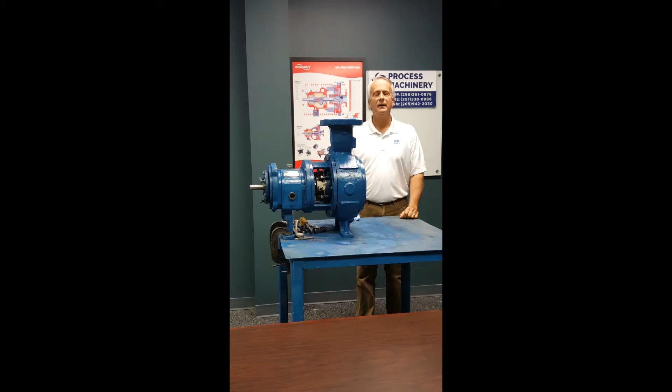Okay, today we're going to talk about tearing down a pump and maybe doing a little troubleshooting of the pump, why it failed, and then we're going to go through the dial indicator steps, impeller adjustment, and reassembly of the new mechanical seal.

This is an overhung pump, bearings back here, shaft over here, so whatever we show today is going to be applicable to any style overhung pump. Much of what we show today will be applicable to between bearing pumps as well, but you just have to apply the dial indicator steps for that style pump as opposed to this style pump.

So we got all the bolts loose except for this one. And by the way, I'm looking here, and the first thing that I do when I come up to a pump that's failed is I visually look in the mechanical seal area. So your old seal has a specified gap between the drive collar of the seal back here, which locks your seal to the shaft, and the back of the seal gland.

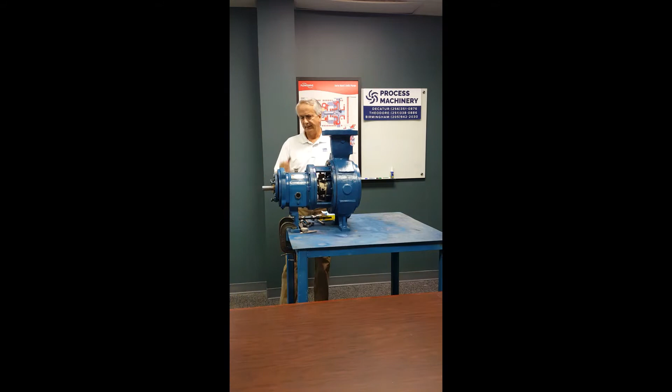And notice these are setting clips. So this seal actually is a demo seal, but your seal, the old one, the setting clips will be removed. But the first thing I look for is, did this gap change compared to whatever your mechanical seal drawing specifies? If it did, then maybe you got a bearing issue, or maybe somebody didn't tighten down the set screws adequately, or vibration caused them to back out. Okay, so here we go.

I also noticed, by the way, just on this pump, this is an open style impeller, and the clearance in your IOM manual is between the front side of your impeller and the pump casing. Well, I'm noticing here a big gap, and in fact I got the feeler gauges out, and the gap is quite large. It's almost 200 thousandths of an inch.

And on this style pump, you'll have to consult your own manual, but generally 10 to 20 thousandths of an inch. Definitely temperature dependent. As the metal grows, those gaps have to be opened up. Okay, all the bolts are out. We're going to hopefully drop this casing.

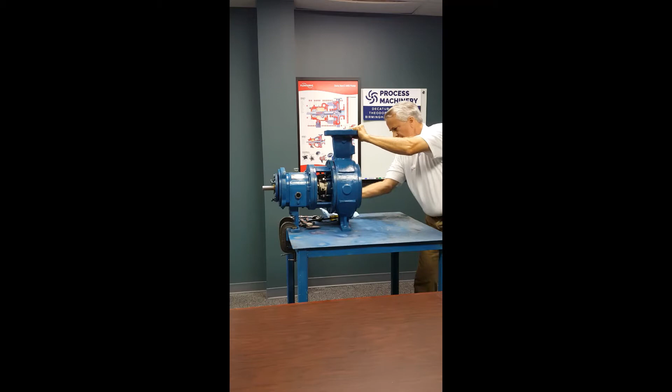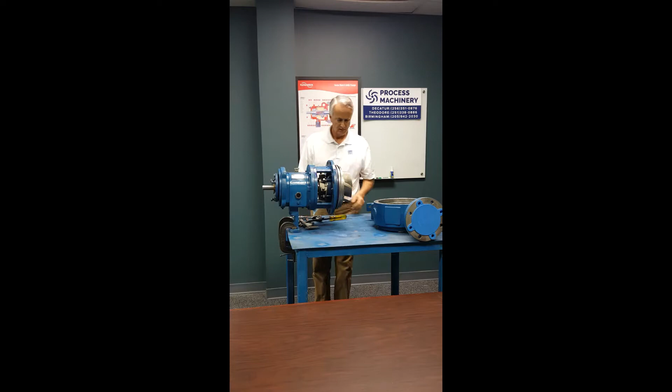I can clearly see inside the pump casing there's a tremendous amount of wear between the running clearance of the leading edge of this open style impeller and the casing. So really, in this case, that casing is completely shot. The impeller doesn't look terrible, but that's something to look at. Definitely no reason to rebuild this guy.

All right, so next, this particular impeller is a threaded on impeller, and so you want to get the impeller off. Okay, so now we're gonna unscrew this impeller, and a lot of times they're gonna be tight because the rotation of the pump tightens the impeller, and if you've got cavitation or vibration, it's going to just tighten it more and more. So here at this shop, we make these shaft wrenches of various sizes of common pumps. This way you don't scratch up your shaft. Please don't use a pipe wrench.

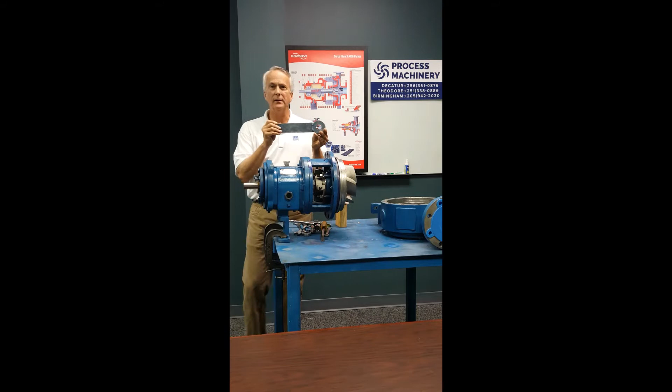Okay, so we put some key stock in here, put our shaft wrench on here. We're going to take this block and we're going to screw in the opposite direction of pump rotation and jam the impeller against it. Okay. That one came out amazingly easy. So we're gonna unscrew our impeller off. You see it open up maybe.

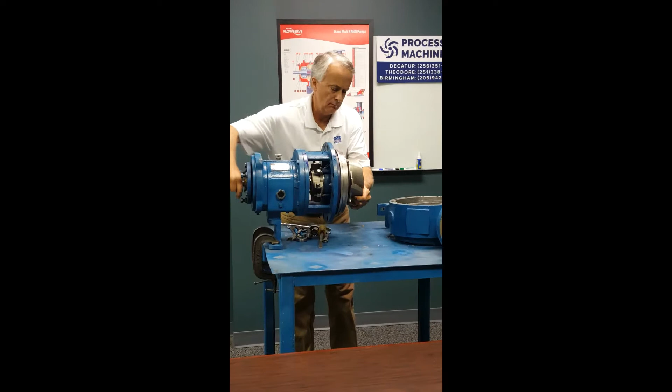Okay, and so these are the leading edges of this open style impeller. And these have to run in a close proximity to your pump casing. Otherwise you lose all kinds of efficiency and therefore flow rate.

All right, now this is our stuffing box. Some people call it a rear cover. There is a gasket that seals the rear cover to the pump casing. Inspect it, no problem. Here we go. We're going to set this thing in here. It looks pretty good. So when you use a new gasket, just go ahead and put it on your parts and make sure you're not going to have any problem when you try to go together.

All right, there are two little keeper nuts that hold this stuffing box in place. These are our mechanical seal bolts. What I'm going to do first is loosen the mechanical seal bolts, remove them. That way the mechanical seal will stay on the pump shaft for now.

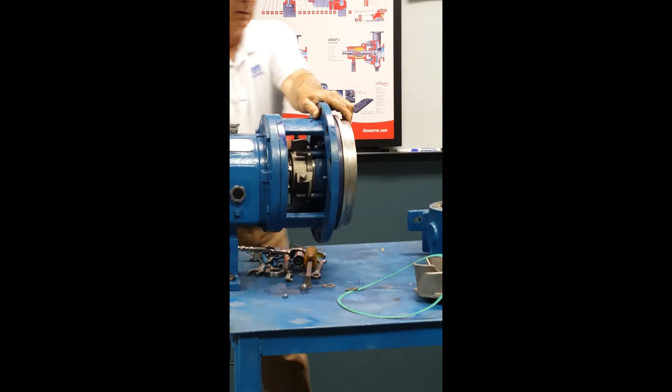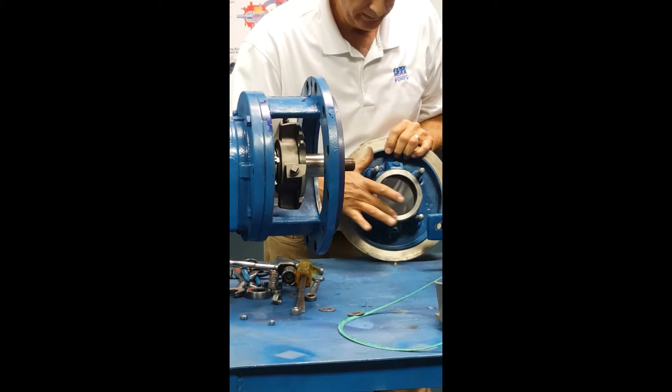Okay, then I'm going to remove these nuts off these studs. Hold on to this in case something were to turn loose on you. Okay, and then we're going to remove this guy. Notice the mechanical seal is staying in here. This is the stuffing box. The mechanical seal gasket seals to this surface here. So it'll be critical that we look at this surface, inspect it, make sure it's in good shape.

Notice also that this has a machined OD here and it has a machined ID. So while this particular mechanical seal is a shaft-centered seal, they also make seals that are stuffing box centered seals, where there's a registered pilot that goes around either the OD or a male register that goes into the bore of the box. Two different type configurations there. This, by the way, is a single standard cartridge seal, nothing special. Okay, coming off with the old seal.

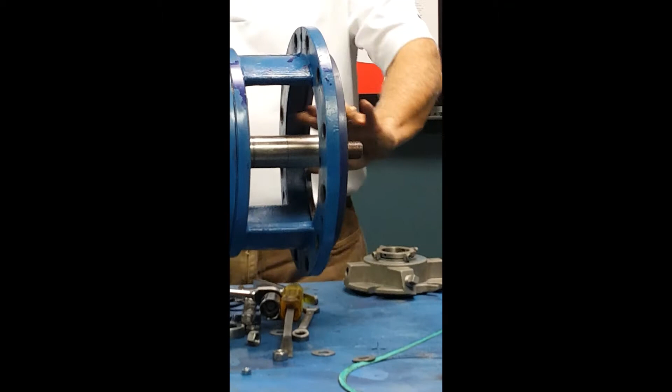First thing I do is I inspect the shaft to see if there's any kind of action that might have taken place between the set screw area of the seal and the shaft, like it lost its grip and it was spinning out, or I look for the indentions, the dimples for the set screws, because what drives the seal are these set screws. They're cup point set screws that bite into the shaft. In fact, this shaft does have some evidence that in a previous life the seal did spin out on the shaft.

Either way, I look at the shaft or the pump sleeve and inspect to make sure that we've got a nice chamfer on the leading edge so that when we slide the new mechanical seal up there, it'll go on successfully, and whether or not we have any high spots or any kind of dents or variations in this shaft. Maybe it does, maybe it doesn't, but if it does, you need to replace that.

Okay, so now we're kind of into our full inspection of the pump. The only thing that was a problem on this pump was the mechanical seal was leaking. We think the bearings are good, but we got to verify. If your oil is clean and clear, maybe you don't need to change bearings. If all your dial indicator readings are good, then no reason to, in my opinion.

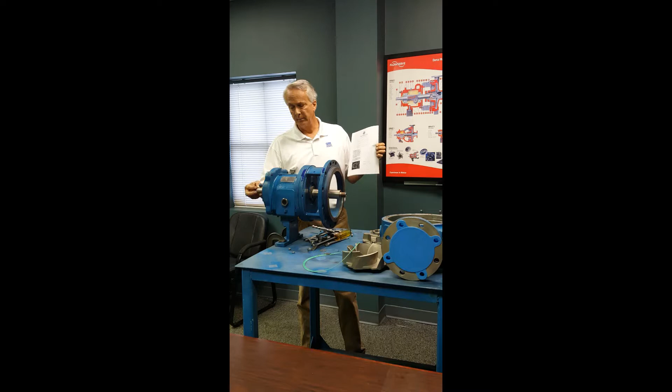Many times people remove coupling hubs with hammers. That's a really bad idea. This shaft is not very big in diameter, and it is extremely easy to bend this shaft. So either put a set of pullers or use pry bars on opposite sides, but please don't use hammers to knock off your coupling hub.

We also have checks for bearing fits, where we lift up and down, see if any looseness, on both ends. And then we also mount a shaft mounted indicator, pull the stuffing box in without any studs, and we sweep the face of the stuffing box to make sure that it's perfectly square with that shaft. Any angularity of your stuffing box face, like this, makes the mechanical seal work extra hard every revolution of the pump, and they'll fail quickly if you've got an out of squareness situation going on.

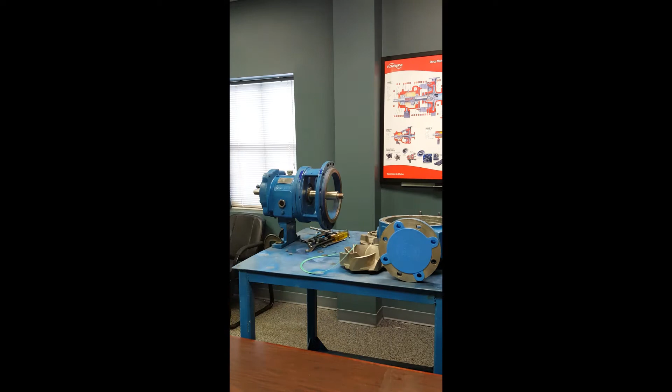Okay, now we're going to set up a dial indicator too. We're going to show you how to do these readings, and we're actually going to fill in the readings. Okay, so we've now got the indicator set up in a fixed position. The indicator needle is running on the shaft approximately where the mechanical seal faces are running.

And we're going to fill in this value, and it's a good idea to do this on every pump you work on. That way you got a record of it, and you will catch so many things that might be wrong with the pump that you otherwise would be unaware of if you'll do these indicator steps. But anyway, we will record the inboard, which is next to the impeller, reading right here.

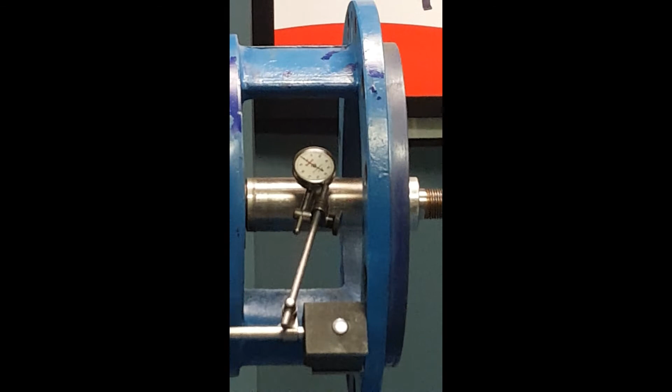Okay, so our indicator is on 0. We're tight here, we're tight here. I check it to make sure, pulling it just a little bit, okay? And also check to make sure my indicator needle is not bottomed out, which it is not. And I'm going to slowly rotate this thing. Make sure I rotate it 180.

I'm watching the indicator. It did move some, yeah. Okay, so I'm seeing about 0.5 thousandths. The tolerance there, obviously less is better. Maybe 2 thousandths max. If it's a big diameter shaft, that tolerance may go up a tad. But on this style pump, typically I don't like to see more than 1 thousandths, but you can get away with maybe 2.

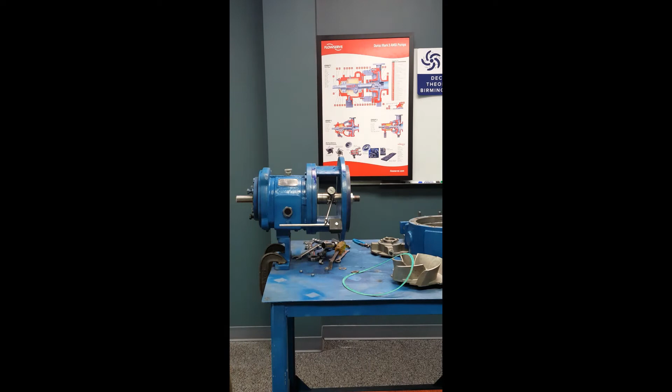Okay, we're going to take this indicator now, and while we're in this same setup, we're going to skip to this dial indicator reading right here, which checks for looseness in your housing and in your bearings. We're gonna check it on both ends. So basically, I'm gonna grab this shaft and I'm gonna pick up and down on it and see how much travel is done. So, can we see that indicator? All right, so

I don't want to put so much force on there that I bend the shaft. I'm seeing next to nothing there, maybe a half thousandths. That suits me. So now we'll go to the other end of the pump and basically do the same thing.

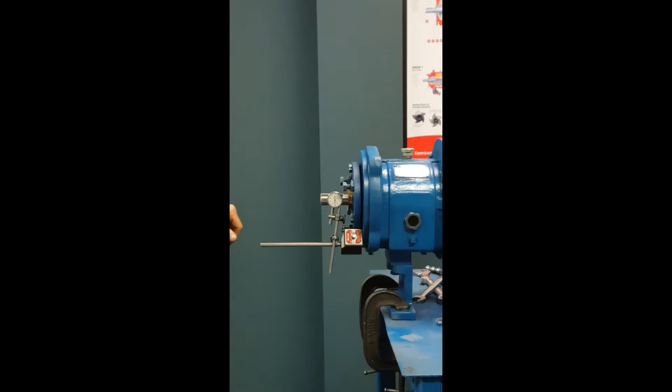Okay, now we've got the indicator set on the outboard side of the pump. We're going to check the coupling end. And of course you got a keyway, so you can't measure in the keyway, but we start on the edge of the keyway. I've got it zeroed out. And let's see what we get. We're going to check for shaft run out. Is it straight?

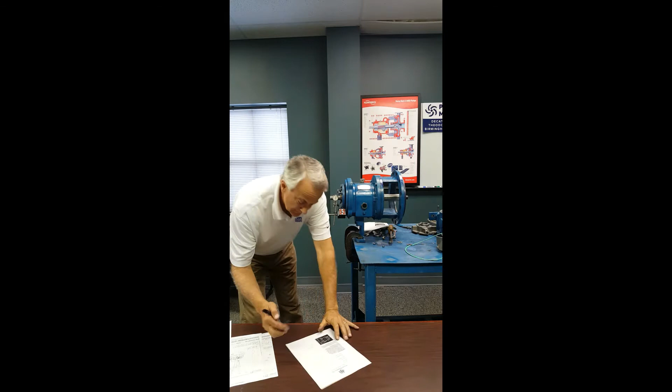I don't see anything back there. Well, I do actually. My bad. Maybe a half. And oh, by the way, on this sheet, we've written down our inboard shaft run out at a half thousandths. I'm going to write in here now the outboard run out at a half thousandths. We also wrote down the bearing fits on the inboard side at a half thousandths.

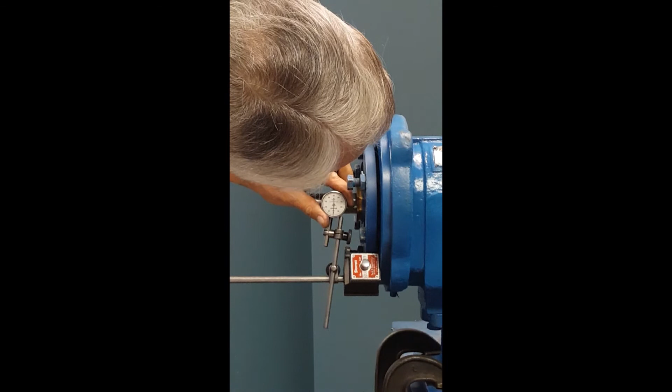With this setup here, I'm going to push back and forth on the shaft and see what we come up with on the outboard side. So our indicator, 0. A lot of times you can actually feel looseness. So when you pick up and down, if there's a thousandths and a half, 2 thousandths, 3 thousandths worth of slop built into your bearing or between the bearing and the housing, you can actually feel it clicking.

In this case, I'm pulling back and forth on it pretty hard, and maybe I get a quarter of thousandths, but I think I'm probably bending the shaft slightly, so we got nothing there. I'm gonna write down here on the outboard side, 0 thousandths of an inch.

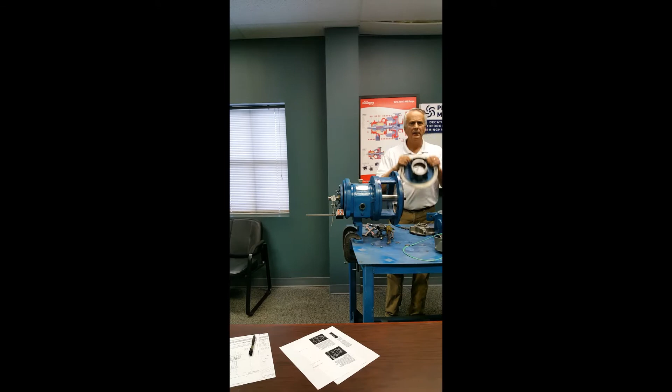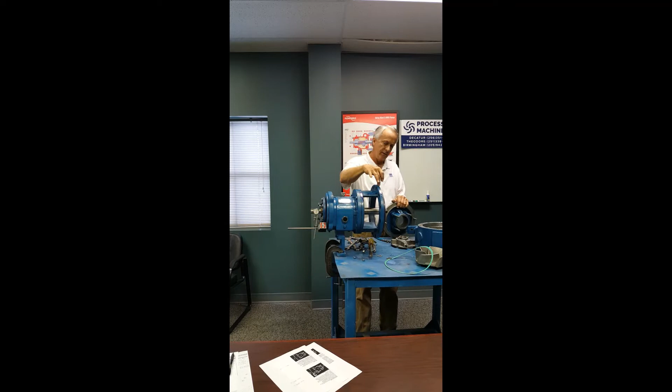Okay, next, we are going to take the indicator and we're gonna mount it on the shaft so that we can rotate the indicator against this surface that the mechanical seal runs up against. By the way, all your register fits in your pumps are very important. There's a set of dowel pins here that centers this part to the bearing housing, and then what centers this part to the stuffing box is this register right here. It's a male register, female register inside this housing.

You want to check for looseness. It needs to be a snug fit. Essentially no looseness. So to do this check, I'm going to have to remove all these studs because otherwise they're going to get in the way of the indicator. Then I'm going to mount the indicator on the shaft, and we'll show you how we do that.

Alright, I'm going to take this stuffing box and without the studs in, I'm going to put it back in the pump. I'm going to just lift up and down, and there's a tad of slop between the female and male register there. So I'm not going to bother taking it, but if that reading were more than 2 thousandths, one of your parts should be replaced. You want a good snug fit between the two. Okay.

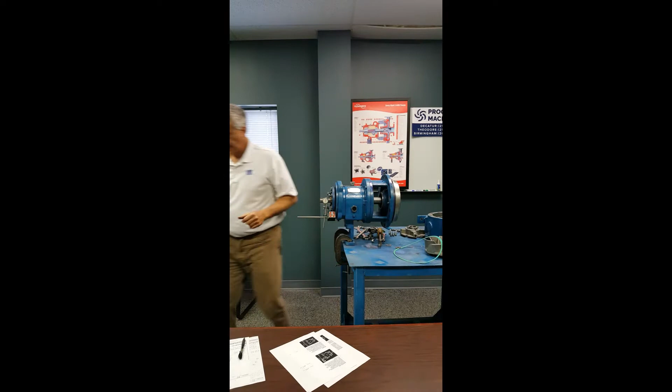So we tighten up on those guys, then we're going to mount the indicator to the shaft. Okay, so now this is another step.

We've shaft mounted the indicator, and our needle is on the face of the stuffing box. We've made sure that that face is cleaned up and doesn't have dents in it and things like that, so that we get a true reading. We've gone ahead and pulled in this stuffing box and tightened it with these nuts here. Also, the metal to metal surface between this part and this part, if there's a bunch of crud built up at the bottom, it can kick your stuffing box off. So make sure you clean those surfaces up before you put these two parts together to check it.

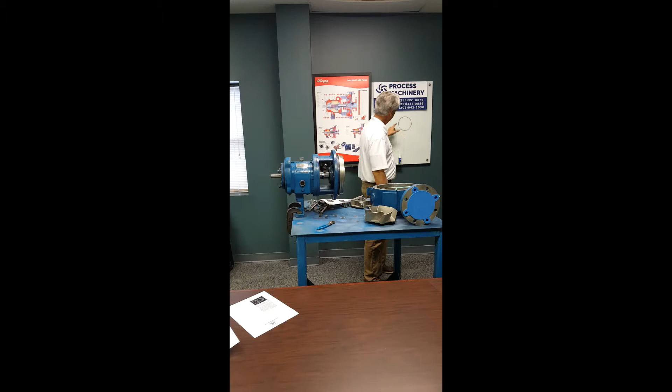But we're going to check the stuffing box face squareness to the shaft. Again, if it's like this and your shaft's like this, that seal's going to fail pretty quickly. So what I like to do is I'll draw myself a circle, and for you guys that are millwrights, we're going to take the face reading on the stuffing box here. We always start at 12 o'clock, 3, 6, 9. I record it as to where it is on the clock so that if I need to figure out how to adjust it to square it up, I know which way to go.

Okay, so you can see our indicator here. It's set on 0. It's at 12 o'clock. What I'm going to do, and you might have to use a mirror for this, but I'm going to rotate it 90 degrees and I'm going to watch it. And there's 90 degrees. I see a half. So we were at 0 at the top. We are plus 0.5. Well, actually, let's write it in decimal: plus 0.0005 inches. All right, now we're going to go to 6 o'clock.

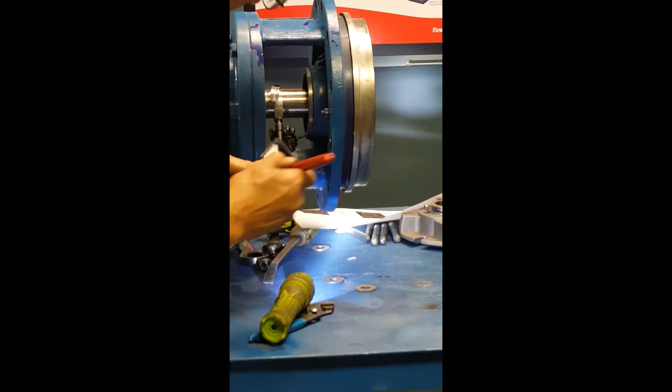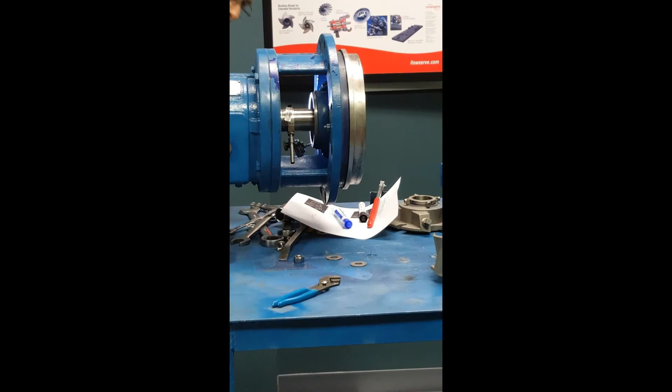And I'm going to have to get my mirror for this and my flashlight. Okay, that rascal is on 0. So we'll write that down. Sorry. Okay, we're 0 here. And we're going to go to 9 o'clock, see what we are over on this side. I'll be able to see this one. And we are -1. So we're -0.001 inches.

The tolerance on this size pump is 2 to 3 thousandths maybe. And if you take 1 on the negative side and add it to a half, your total indicator reading is 1.5 thousandths of an inch. That's okay. Again, if you get a bad reading here, disassemble this part, take your stuffing box out, and those mating surfaces where it goes metal to metal, make sure they're clean, because that could be your problem.

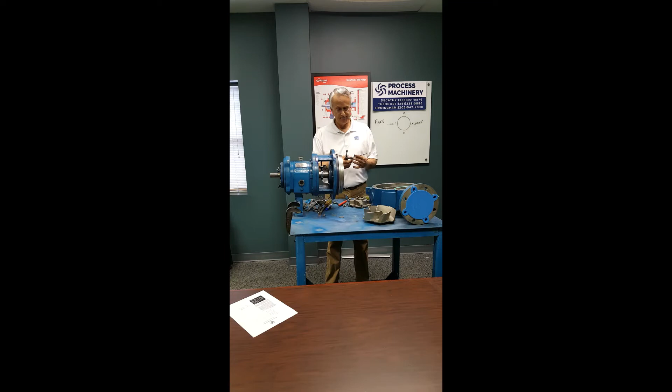There's one final indicator step that we forgot, and we'll go ahead and just knock it out for you. Okay, and by the way, before we get off this indicator setup here, this is probably one of the more important ones, but it's one of the ones that people generally don't do. Why? Because you've got to remove some studs, then you've got to go to the trouble of shaft mounting it, and some of these dimensions in here can be fairly tight. So what we came up with is we took a hose clamp, various sizes, and mounted an indicator holder rod right there, and it does a real nice job quickly attaching your indicator to the shaft. Also, Blom makes a nice tool, the shaft indicator holder with big chain for large diameter shafts. All right, we'll be back in 1 second to show you one final reading that I forgot about.

Okay, so I've recorded in here the 1.5 thousandths total face reading, non-perpendicularity of the sealing surface. While you're on that indicator setup, and if you have a stuffing box large enough, and particularly on registered fit type seals, where you've got a register between the mechanical seal gland and the stuffing box that centers it, you need to reach in here and check the rim reading also. Check to make sure this stuffing box is perfectly centered with that shaft.

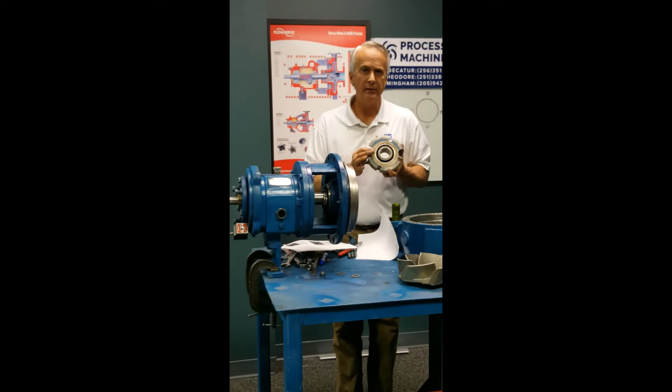This pump is a little bit on the small side, it's not practical, and in this case, this is a shaft centered seal. On the flange here, there's no register, there's no boss to center it up. When you install this seal, these clips here hold the rotating portion of the seal perfectly centered with the stationary portion, courtesy of the fact that these clips grab around a machined surface here. So this is a shaft centered seal.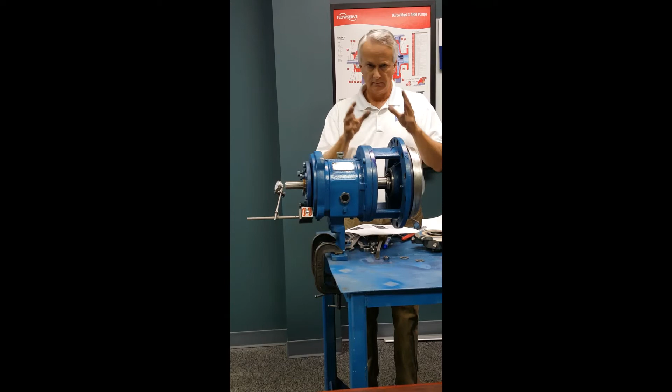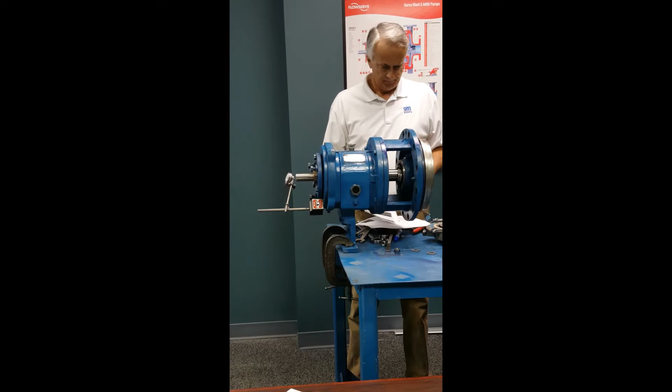So I'm not going to take the rim reading on this pump, but particularly on bigger pumps, particularly with seals that are registered fit type centered, you need to take them. And whatever you need to do to square up that face and center it is very important. Otherwise, if it's not centered up, you can actually have contact inside the seal. Your stationary face will be out of center with respect to your shaft. You potentially could touch off and fail the seal.

Okay, so in addition, the last reading that I failed to get was a thrust reading on the shaft. So we want to make sure that the thrust bearing is going to adequately hold this shaft in place during operation. So in this case, I've got an indicator set up here on the end. The indicator needle is on the shaft, and I'm going to grab the shaft without disturbing the indicator, and I'm going to pull in and out on it, try to pull the slop out of it.

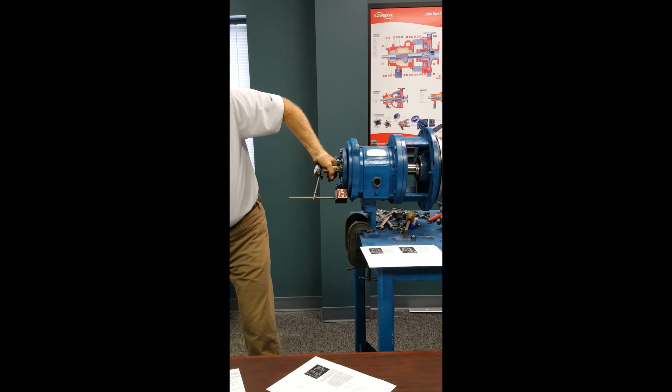Now in this case, I don't have a great grip. Okay, I'm pulling towards me, pushing away. I see a 1/2 thousandths. So I'm going to record that. That sounds good. Okay. Shaft end play. Thousandths of an inch. All right, so now we pretty much got everything done on our readings.

We've got runout of the shaft inboard, 1/2 thousandths. Runout on this end, again, 1/2 thousandths. Shaft is pretty doggone straight. Then here you've got face squareness, total, negative plus positive, 1 thousandth. This shows a setup for taking the rim reading, concentricity of the stuffing box with respect to the shaft. We did not take that reading simply because of the size of the pump and we got a shaft centered seal.

Then here are the bearing fits. We got a 1/2 thousandths on the inboard side, and we got 0 thousandths on the outboard. Good tight bearings. Then here we filled in a 1/2 thousandths, and that's for shaft end play. Now, I'm going to fill out the date, the customer, various information, the pump model, serial number. I'm going to date it. I'm going to sign it. Obviously, if there are any problems that you encounter, fix them before you go spending the money to put in an expensive mechanical seal.

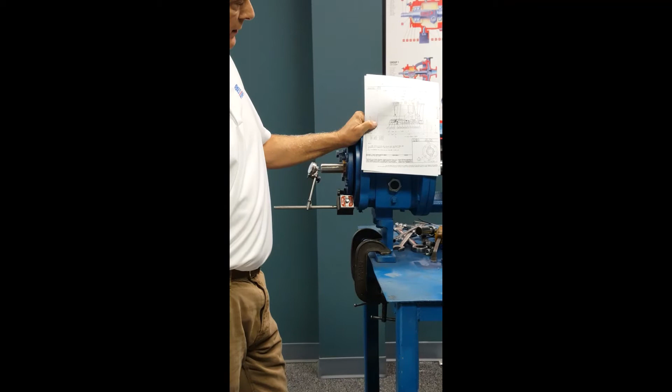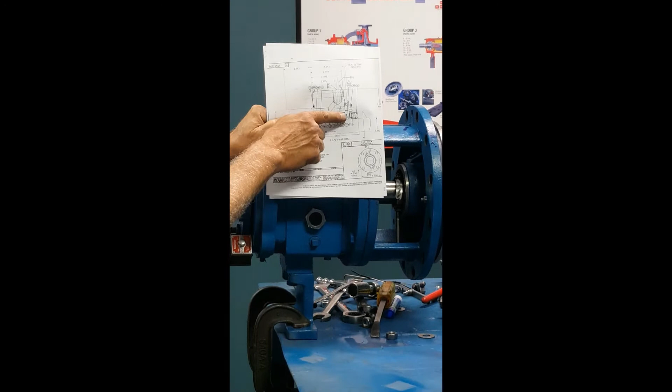By the way, I talked about a shaft-centered seal versus a stuffing box-centered seal. Well, this actually shows a stuffing box-centered seal. Here's your stuffing box right here. There's your pump shaft. This whole deal here is the cartridge seal. And notice this male lip, this male register that goes in the bore of the stuffing box. So that's what centers that seal. Notice the setting devices are simply clips that slide into a groove in the sleeve.

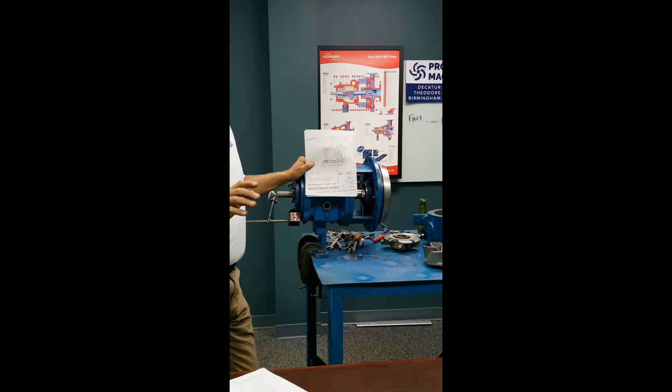So when you work on any seal, get your drawing out and figure out, is it shaft centered? Is it stuffing box centered? How do my setting clips work? Do they grip the outside of a metal surface, or do they go in a slot, etc.? This is a drawing of a shaft centered seal. Notice that there is no lip between the seal gland and the stuffing box, which is right here. Of course, pump shaft here. And also notice that the setting clips, mounted on the drive collar, actually grip around a machined surface on the back of the gland.

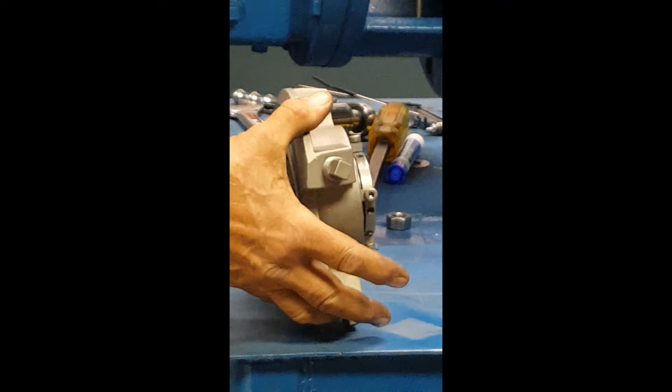When you troubleshoot seals, you get a work order that says, hey, go replace seal on ABC pump. Again, first thing I do is I look to see if they have the proper gap between the drive collar and the gland. We talked about it earlier. That's a place where, if a guy gets busy or doesn't pay attention, he doesn't properly tighten them down, or maybe he tightens them down, takes the clips off, and then he adjusts the impeller. No. Adjust the impeller with the clips in place. Do not secure the seal to the shaft. The last thing you do is set that seal to the shaft and remove whatever setting device is on that particular design of seal.

Okay, so next step, I'm going to put my studs back in. I'm going to pull all these indicators off. We're going to put in the new mechanical seal.

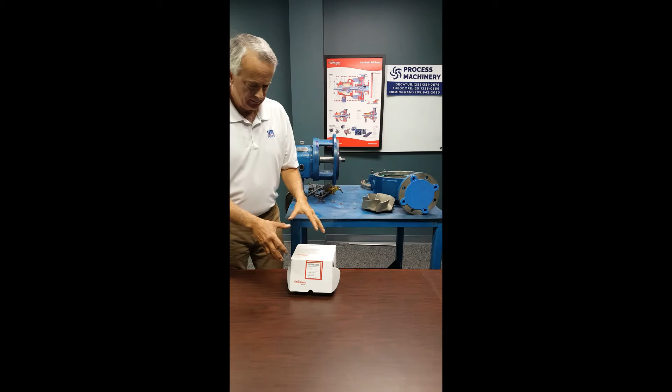Okay, so now we got our new mechanical seal. Open up the box. In every mechanical seal, generally there's going to be a mechanical seal drawing in there. It tells you what pump it fits. It gives you all the dimensions of the shaft. The stuffing box bore gives you a lot of helpful information. Generally speaking, it'll have a bill of material over here. It'll tell you the materials of the seal that you're getting ready to install.

This is a mechanical seal. It's got various cautionary notes on it. Take note of them. Read every one of them. This seal, it says it's been tested at the factory to 25 psi. They put this on a mandrel, they put clean compressed air to it, and they shut it off, and they make sure that it doesn't leak down too fast. So it passed. Then they got various shipping plugs in here.

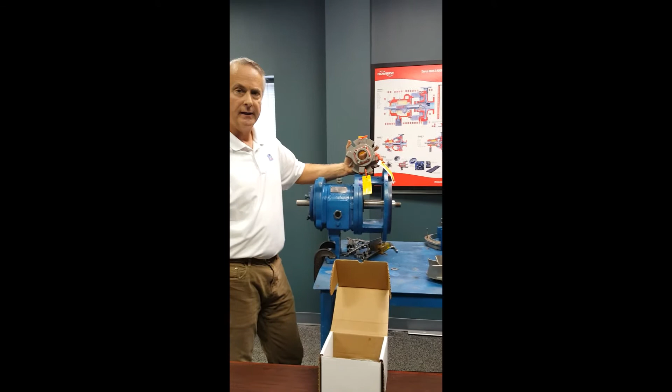Notice here, now this is something that people run into all the time. They call me and they say, well, what are all these ports on here? Well, go to your mechanical seal drawing, and it'll show you a picture of the end view of the gland, and it'll tell you which one is the flush port, which one is the quench port, which one is the drain port. Sometimes they have a vent port. This one has 3 ports, drilled and tapped ports. On your drawing, you'll see this is the flush port.

Flush means that the fluid goes into the process. The quench port and the drain port, well, the drain, that's pretty self-explanatory. If your seal leaks, you want it coming out your drain port rather than coming out the back and slinging all over the place. The quench port is also on the atmospheric side, so both the quench and the drain are on the air side of the mechanical seal faces. So, and this happens all the time, if you hook up your flush water to the quench port or the drain port, seal's gonna spray all over the place. So just take note of which ports are what.

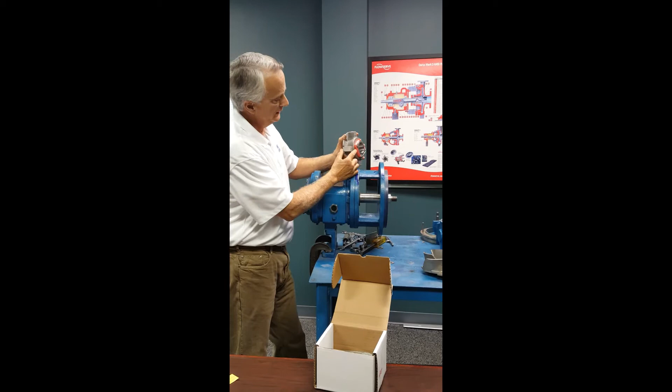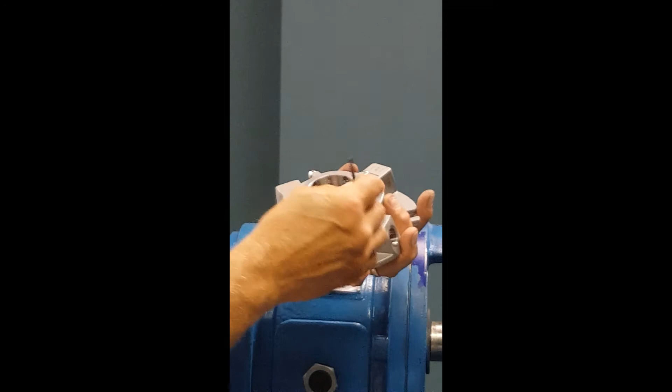So we'll remove these shipping plugs, keep everything clean. They've got a warning decal that says this is where you have to tighten the drive collar to the shaft. I'm going to go ahead and remove this because we're going to basically go through a full installation on a brand new seal. All right, first thing I do is I check very closely back here these drive lugs. The guy at the factory, hopefully he was on his game that day, and hopefully he's got these things properly secured. So I get an Allen wrench and I look at it, make sure everything looks good. I come up to these little setting clip devices, make sure they're good and snug, because if they're not good and snug, then they won't properly center things. Okay, everybody's good and snug.

And then I'll look at the set screws that are going to bite down in the shaft. Now in this case, there are 4 of them, 4 cup point set screws. Bear in mind, there are also 2 locator set screws. These are at 180 apart. Don't mess with those. As the guy's assembling them, he just snugs those down, barely, to locate the drive collar. You do not need to tighten these to the shaft. You tighten the cup point set screws in the case of these standard cartridge seals that bite down to the shaft. There are various mechanisms as far as securing the rotating portion of the seal to the shaft. They have shrink discs, they have ring feders, they have set screw driven collars. This is the most common.

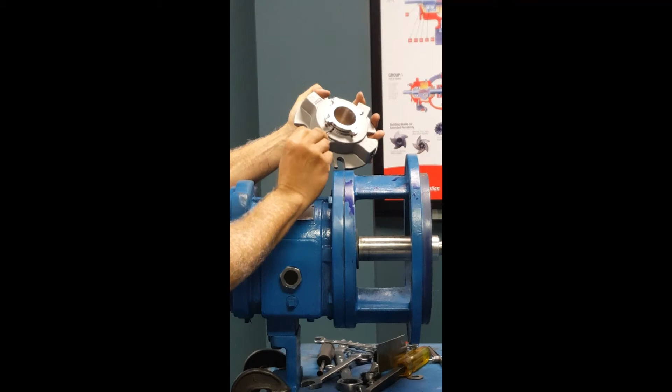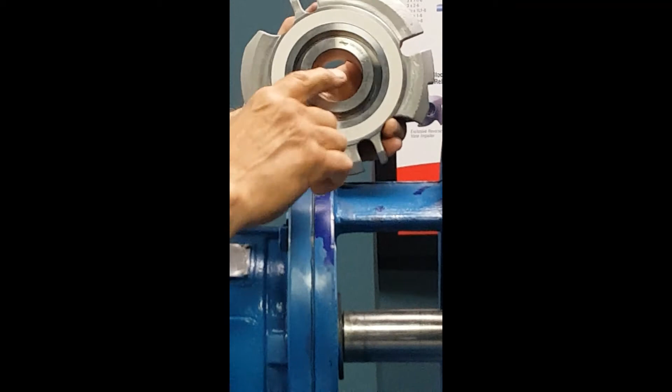I check to make sure that the set screws are backed out enough to where when this one's in just close, I'm gonna back it out just a little bit to make sure that when I slide this thing up on the shaft, it doesn't touch off. Check your gasket on this side, make sure it's fully seated in this metal here. A lot of times they'll have a female register here where the gasket will stay centered. Here's your O-ring that seals to the pump shaft when we install it. It'll be installed like so. I put a compatible grease on that O-ring, lube it up. I keep the shaft clean. Okay.

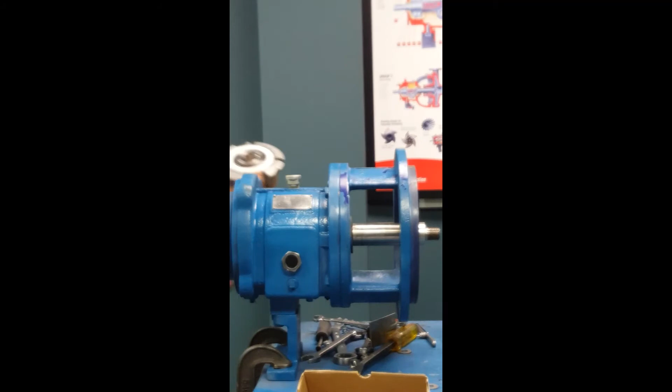And by the way, make a habit of installing the mechanical seal on the shaft. Don't do like has been done on some occasions and install this seal and tighten down on it, because look at this. This is a shaft centered seal, but look what I can do. See how it'll move all over the place? So if you tighten it down here, it's going to be out of center.

So the proper method is to put it on the shaft. And so I'm going to go ahead and install this. Now, bear in mind the quench port, look on your seal drawing, but it's normally at 12 o'clock. Okay? We're going to lubricate the O-ring a little bit. And install this guy. I got my quench port at 12. Okay. So there's the seal on there.

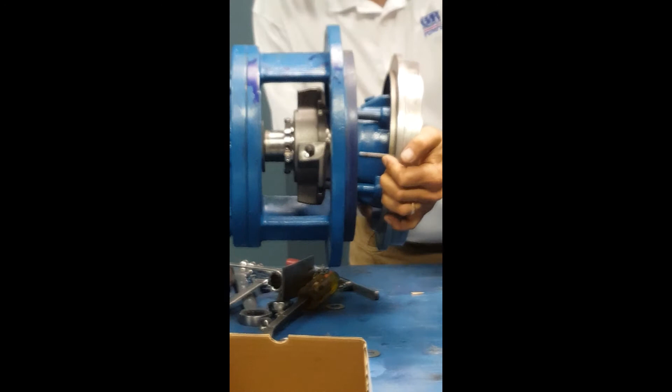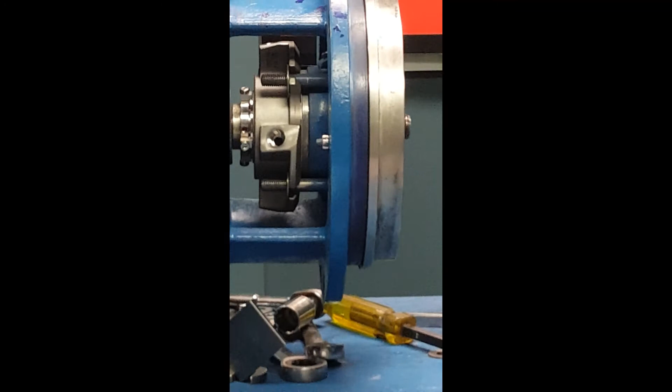Now we're ready for our stuffing box. Goes with the nuts. Okay. Go ahead and snug those up. Okay, now we grab our nuts that are going to secure our seal and our washers. Put these nuts on.

And at this point, this is a shaft-centered seal. And so it's okay to go ahead and tighten the seal gland to the stuffing box. What we don't want to do is tighten the set screws to the shaft, because once we assemble the casing, put the impeller on, we're going to adjust the impeller clearance. So the last thing you do is tighten down on those, in this case, 4 set screws, remove the clips, and you're ready to run. So I'm going to go ahead and tighten these nuts. And then I'll come back, we'll put the impeller on, we'll do the clearance.

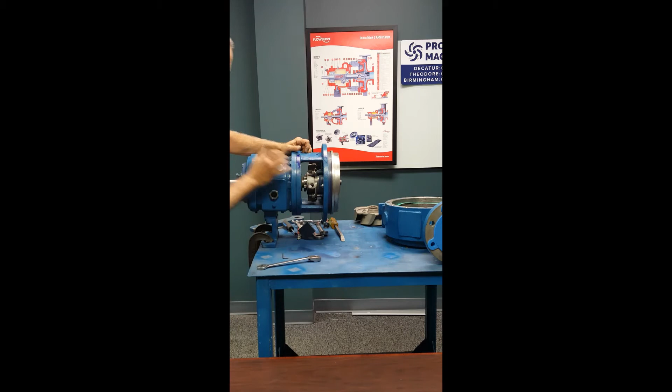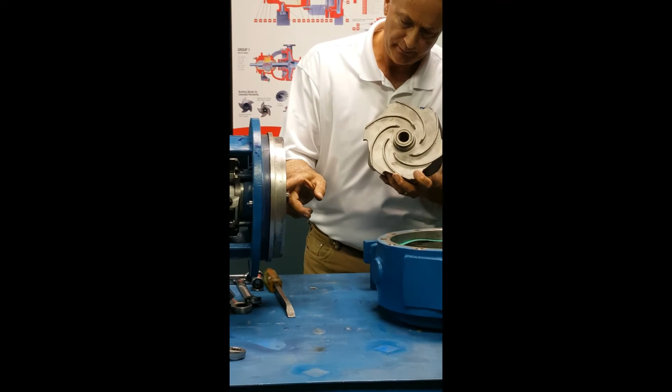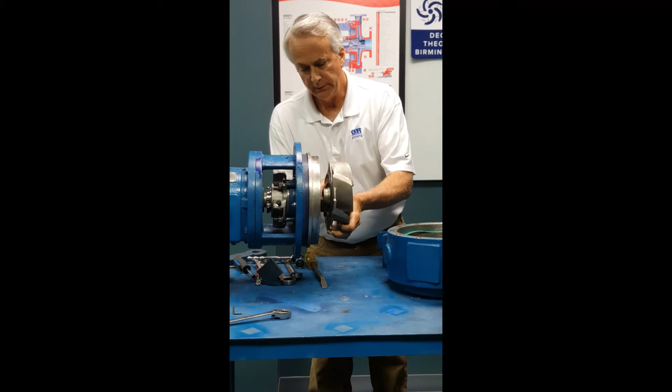All right, so our impeller has an O-ring in this case that seals to the pump shaft here, threaded here. So this O-ring's good, but obviously you'll want to use a new O-ring every time. Little anti-seize here. Don't get the anti-seize anywhere near the seal. Seal faces do not like anti-seize. Anti-seize here. Put the impeller on. Turn the shaft in the direction that the pump's going to rotate.

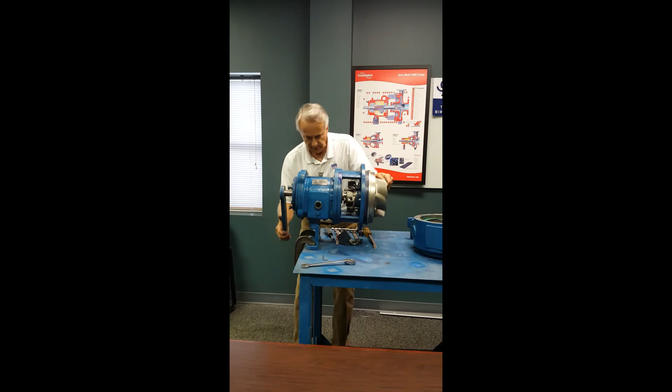Okay, and then we use our shaft wrench to fully tighten the impeller, because before we go adjusting that impeller, we want to make sure we're good and tight. And the way we do it is we'll put this on a metal table, and imagine that this metal comes out to here. And we'll take this impeller and, in this case, let's see. Yeah, actually it'll go like this, sorry. So it'll come over here, boom, and we slam it down on the table. The guys in the shop call them slam wrenches for that reason. But anyway, so we get this guy fully tightened. Notice we still hadn't tightened down our set screws.

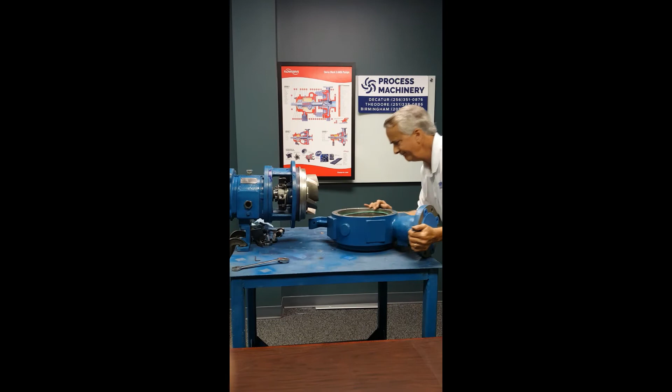So then we're off to putting the back pull-out assembly in the pump in case you left the casing in the field, or if you brought the whole pump back to your shop, installing the case. This is pretty heavy. Get the bolt in here.

Started, and by the way, it really helps to have this pump on a flat table when you're doing this step. Now this table is not flat, but if you've got a granite block that's been polished off flat, that's what we assemble them on. Because that way, the bottom of your machine pump casing feet and your bearing housing feet will be parallel with one another. Minimize any chance of any soft foot when you go to mounting this pump on the base plate.

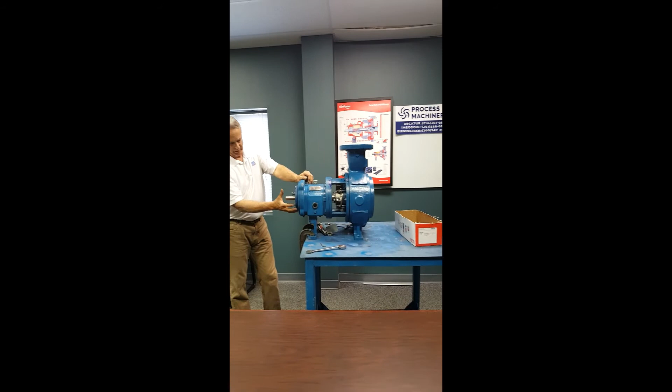So this little deal back here on this style pump has a thrust bearing carrier here that has 3 pull bolts that pull the housing this way and 3 push bolts with lock nuts on there. So this is a slip fit between this part and that part, so bear in mind that if you overtighten one side, you can actually cock the housing in here.

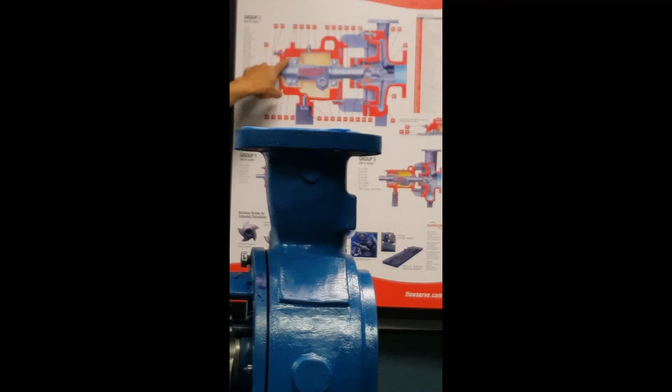And I've actually seen people where they are not paying attention and they actually lock the bearing up, because the internal clearances on the bearing are very little. This pump is a little different in that here's your housing here, and this is a machined thread between this bearing housing here and this larger housing.

So in this case, it doesn't have any push bolts, pull bolts. It has three little keeper bolts that once you get the impeller set to the right place, then you snug those up and that's it. The cool thing about this is, because it's threaded, the potential for putting a bearing in a bind or misalignment is minimized.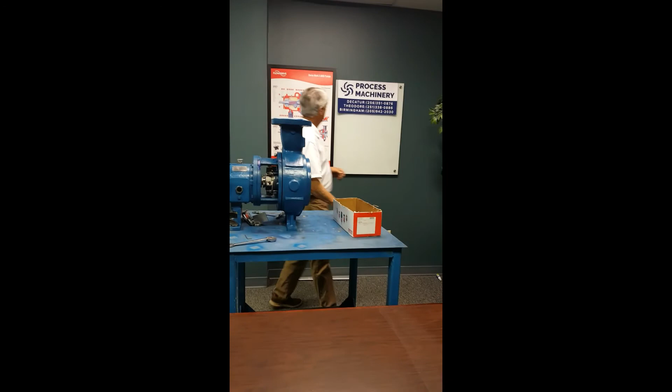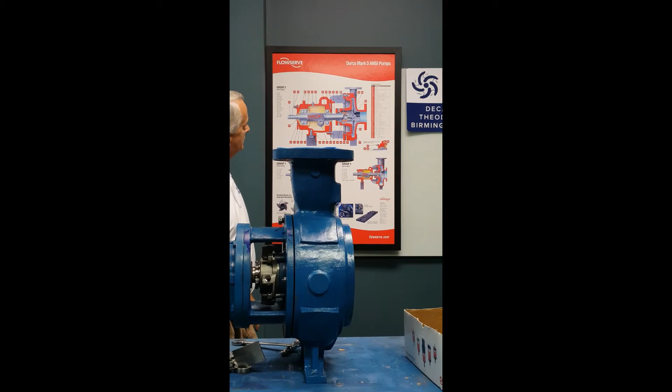Another feature, we talked about this guy being an open impeller pump. Well, in this case, here's your impeller in this pump, and this is a radial clearance between the wear ring of the casing and the impeller, and then this is a front shroud. Well, it's open on the back side in this case. So the running clearance on this pump is between the back side of the impeller and the stuffing box. Okay, just consult your manual to figure out what you've got and what you don't have.

So the first step, we've already verified we've got over 200 thousandths worth of... the first step is to get this to where my pull bolts can pull everything forward and we can set it properly. Okay, so I want to back these guys out pretty much all the way. They're the push bolts that push it this way. Okay.

Okay, so what I'm going to do is tighten one of these screws until it starts touching off. I'm going to be rotating the shaft. That little noise you're hearing is actually the shaft turning inside the mechanical seal. All right, well, look, our gap between the leading edge of this housing and this is almost completely gone. So I'm probably not going to be able to adjust it to the correct running clearance. As I say, that casing's completely worn out.

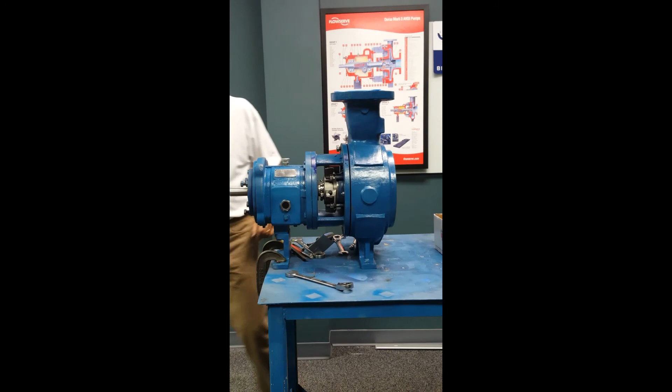So the seal is tight to the stuffing box. Imagine that all these bolts are pulled in and fully compressed. We've set the impeller clearance. So we're ready to go. Now let's set our seal to the shaft. So this seal here, there's one of the set screws. And now bear in mind, this is the only thing holding this seal to the shaft. So these set screws that I'm getting ready to tighten need to be really tight.

Because if your set screws lose their grip, the pressure in the pump will cause the seal sleeve to start spinning on the pump shaft, and the pressure will also push the drive collar back, and this gap here will open up to a larger gap than what it should be. And what that does is over-compress the seal faces.

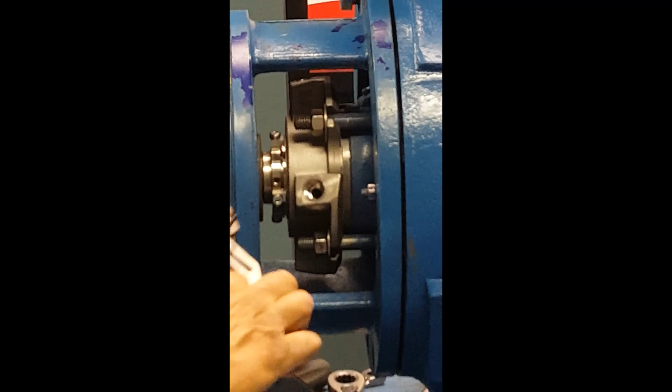The seal faces lose their lubrication, heat up, break, and you're right back in your pump. Okay, so we're gonna go around here and tighten all these guys up. I'm gonna get a pair of channel locks to give me some extra oomph. I'm gonna tighten them evenly. And once I've got them all tightened,

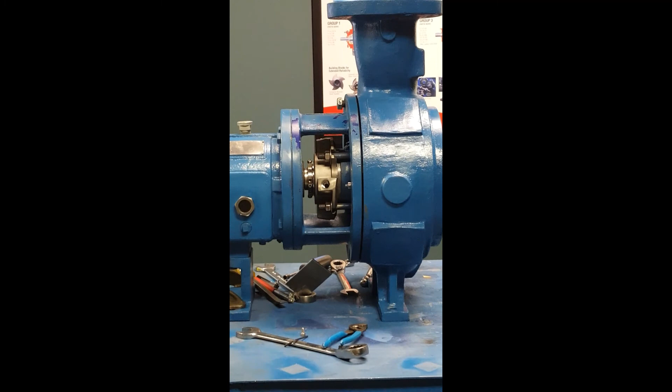then we remove these clips. Your seal is now locked to your shaft. Okay, so, and by the way, notice the width of that piece right there. That is the dimension on this seal between the back of the gland and the drive collar. And in this case, that gap should be 62 thousandths of an inch.

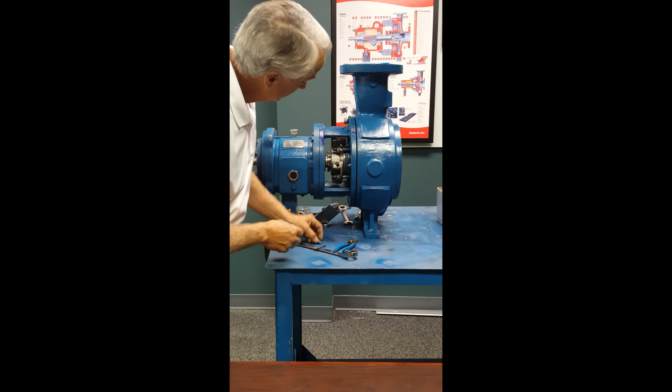So again, if you come up to a seal and the seal has failed and that gap's bigger than what it should be, then that's a serious factor. All right, so we're going to go ahead and remove all these clips. The very last thing, I guess, is thinking about a seal flush. So, depending on the design of the stuffing box, depending on the service you've got, we have all different kinds of seal flush plans. We have a booklet that shows the seal plans; they assign API flush numbers to them.

A very common one is a Plan 11, where you come off with discharge pressure. In this case, we would have a drilled and tapped port here. You screw in an orifice to control the pressure and the flow rate being delivered to the seal, and you flush in with high pressure fluid. Consult your seal supplier as to what flush plan they recommend. Many times, if it's a customized drawing, it'll say over here what flush plan to use.

In this case, this is a generic seal that fits all different kinds of 1 3/4 shafts. It's not application specific, so there's no flush plan indicated here. But you need to think about a flush plan. If you just plug all these ports, or plug the flush port, then there's really no circulation of the fluid back at your seal faces, so it builds up heat. Will it survive like that? Yeah, I've seen tons of seals out there that run with no flush plan.

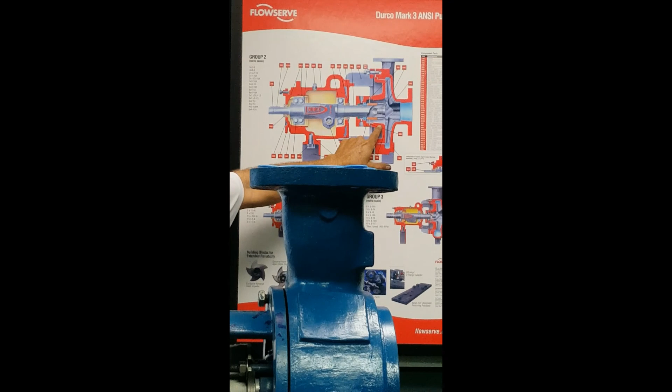Depending on the style of stuffing box the pump manufacturer has, if it's a taper bore stuffing box, then fluid can come in the seal area and go out. So you do get some flow and you don't necessarily require cooling. Here's another example. Here's a taper bore stuffing box with little speed bumps, and that minimizes the amount of swirling the fluid does back here, because if you're pumping a lot of solids, it can erode this part. So those speed bumps knock that out.

But this is self-venting. See how the bore down here is smaller than here. So any air bubbles when you initially flood the pump are going to go out. And also, fluid is able to come in the seal chamber area, cool the seal faces, which in this case are right there, and then go back out.

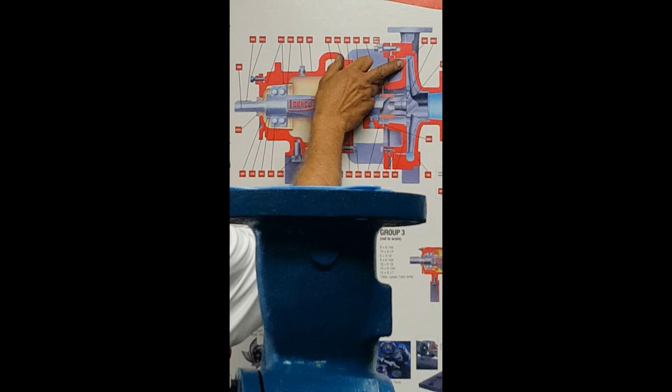This style impeller has balance holes in it. So fluid comes in here at suction pressure. Through centrifugal force, the pressure is increased. Then high pressure fluid comes on the back side of the impeller. This is the running clearance in this pump between the back side of the impeller and the stuffing box. And so you've got pressure somewhere in between suction pressure and discharge pressure coming into the seal chamber. And these are balance holes which allow that fluid to go back to suction pressure. So you're getting plenty of flow back there in that case.

Hot water is a unique situation. Any fluid that's close to its vaporization point. The essence of a mechanical seal, whether or not it's going to last at all, is the fluid film in between your seal faces. If that goes from a fluid to a gas, i.e. it flashes, boils, that's gonna do damage to your seal faces.

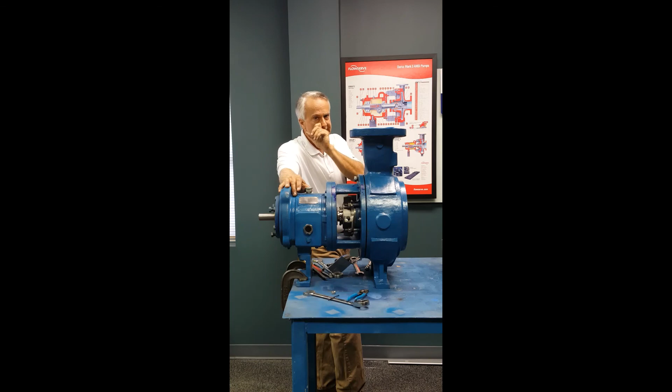So maintaining a stuffing box pressure of at least 25 PSI over the vapor pressure of your fluid is a rule of thumb. If you're running carbon against silicon carbide, for instance, that's more tolerant of being on the edge of flashing compared to silicon on silicon, say, if you're dealing with a slurry seal.